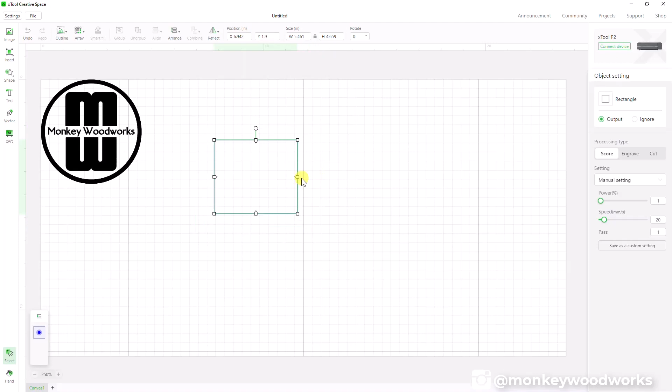So you control the size of it by either dragging it - grab a corner, grab a side or corner, and drag it. Come over here and do the same thing. Or you can come over here and set the size.

Let's say I want this to be 3 inches in diameter. So the width is going to be 3. And there you go, I got 3 inches wide and it's 3 inches high.

But let's say I wanted this one to be 3 inches also, but I want it to be 6 inches high. Well, if I come over here and type 6, now I didn't want that - I wanted it to be 3 by 6. Well, that's because you had the padlock turned on. You just turn it off and change this to 3. Now it's a 3 by 6.

So you have to have this proportionate lock on depending on what you're working with.

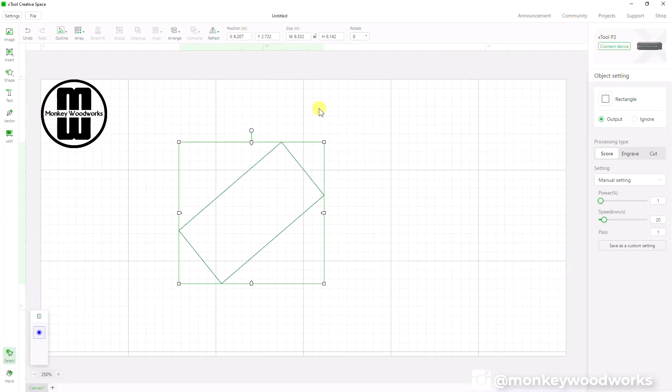Rotation is over here on the right. When you select the object, you can change the rotation of the object, or you can grab this little dot in here at the top and drag and change the rotation. A lot of times I rotate it, but depending on what I'm doing, I'm either going to do it by hand up here by typing, or I'm going to drag it. It really depends on what object you're working with and what you're designing.

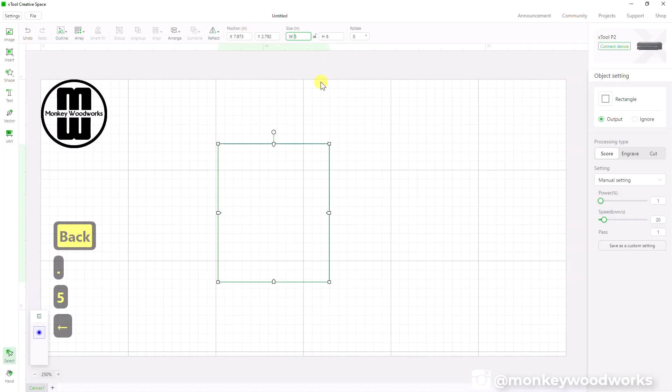Another thing I want to point out is a bug inside XCS. Let's say I wanted to make this rectangle a 1/2 inch wide. So if I come over here, take this out - this 3, backspace - I'm going to type 0.5. Wait a minute, that says 5. I want a point, so I moved my cursor in front of that 5.

I'm not sure if you can see it that well in this video. I'm typing the point, but it's not really doing anything. It's not changing this because there's a bug inside XCS. The way to get down into the decimals from a whole number is kind of goofy. You have to actually drag this by hand into the decimals.

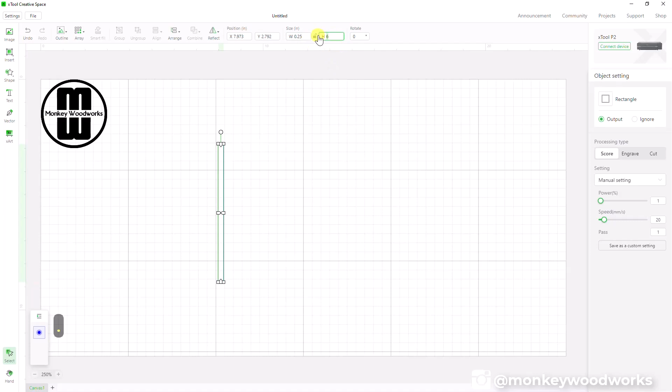Now I'm below that 1, and I can now convert this to 0.25. And now I'm at 0.25, right? So I can't make this 0.25 square because I have it unlocked. I want to say, all right, I'm going to change this to 0.25. My point's not working - why is it not working? Because of the bug inside XCS.

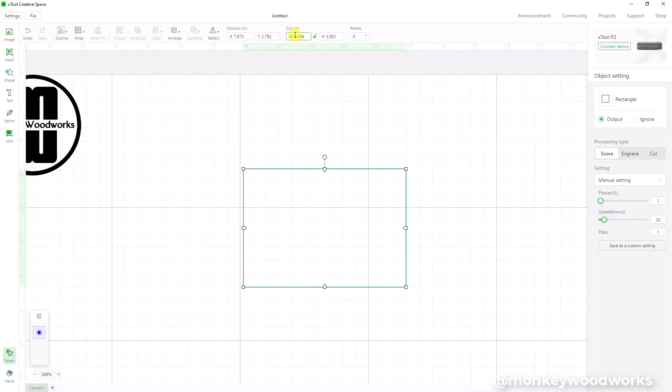You have to drag it below that 1, where you're into the decimals. And now I can say, all right, 0.25, go 25, and I can fix this one, 25. And there we go, there's my quarter by quarter square. So keep that in mind as you're changing the size of things. If you want to go from a bigger object down to something below that 1 mark into the decimals, you cannot do that by typing in up here.

Also over here on the left, you can insert a circle. You can click and start dragging.

If you hold down Shift, it makes it a perfect circle. Same thing with the square. If you click the rectangle, select and hold, you can make it as big as you want, or you can hold down Shift and now it's a perfect square.

The line is a little bit weird. It is kind of buggy sometimes. So if I pick on line, I can pick and drag a line. That's all well and good, but I want it to be horizontal or vertical. You can hold down Shift and now it's horizontal or vertical.

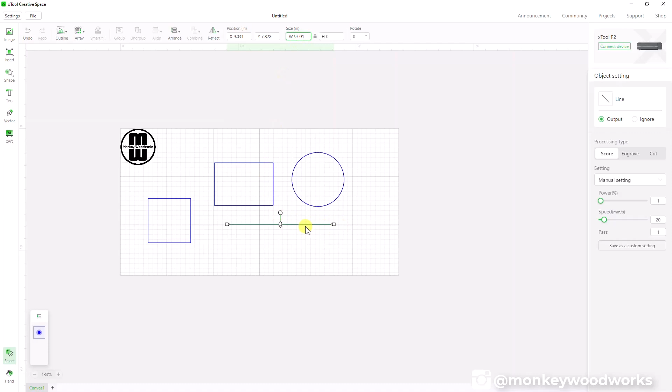However, let's say I want to manipulate this. If you're going to manipulate this line to adjust the width of it, I suggest you do it up here. Don't try to do it down here because it's kind of flaky. I'm going to set this to 5, okay? That's pretty easy. But if I accidentally try to move this thing...

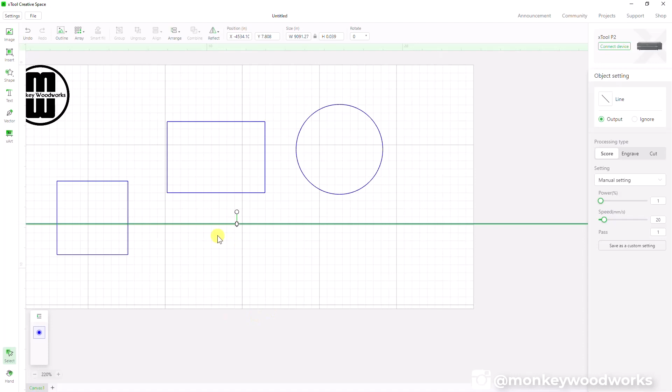Let's say for whatever reason I accidentally grabbed this and moved it. Well, now it made it an infinity line. It's all the way as far as this will go, and it's a crazy height, and it broke the line. So be careful with lines. Lines are kind of weird when it comes to actually moving them around. So that right there, I tried to grab it and move it, and it went infinity again, so I had to undo it.

You can change the rotation of lines, but really, manipulating lines to change the width or something, you're better off doing it over here. Over in the shape tool, you have the ability to add multiple shapes. This is really handy when you're creating different things and just getting started. You can drop in hearts, moons, triangles, rounded corners, squares, ovals, anything you want that's available right there. So that's really handy to have.

And then underneath that, you have the text tool. When you click that, the text will automatically show up on the screen. It'll automatically show up here no matter what. Even if you're zoomed in way over here and you click text, well, it actually shows up again at the top, sort of top center. You just have to remember that when you're trying to insert new text on the screen, you have to zoom out, find it, and move it where you want it to go.

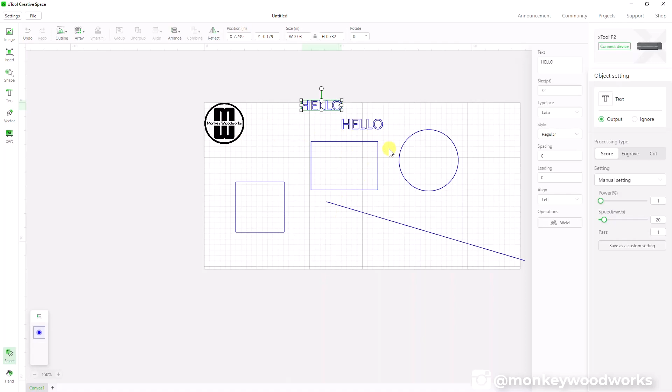It always shows up as the word hello right now, according to XCS. And to change the font, you don't actually double click on this font here. You come over here on the text tool. The text tool goes away when you don't click it. When you click it, there's your text tool, and here you can actually change the font.

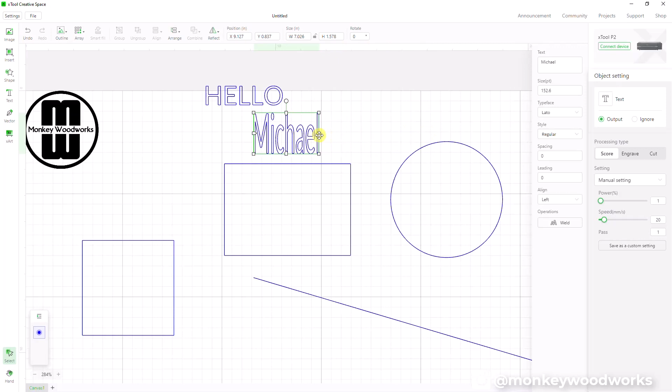I'm going to change it to Michael, and I can change the size. I can make it like, say, 90. That's all well and good, but I really don't use that - I most of the time use my drag. And the lock proportion works the same way with text. I can unlock it and make it squishier, elongate it, whatever you want to do.

Typeface is the font you use. The font it pulls is what's installed on your computer. So if you have a font you downloaded from Etsy or whatever, and you want to use it inside XCS, you can. Close XCS, install your new font on your computer itself. Once installed, launch XCS, and you should have that new font available inside here. You can go over here and type it, and as you start typing, it'll find it in there.

Another thing you can do is the style. The style is associated with the font chosen. So this font actually has these styles available, whereas maybe another font - let's pick this one here - this one only has these two styles available. So the styles are related to the font itself.

And spacing is the spacing between the letters. You can control that. If I hit 2, see the gap is much bigger than 0. And I can make it a -1 to make them even tighter.

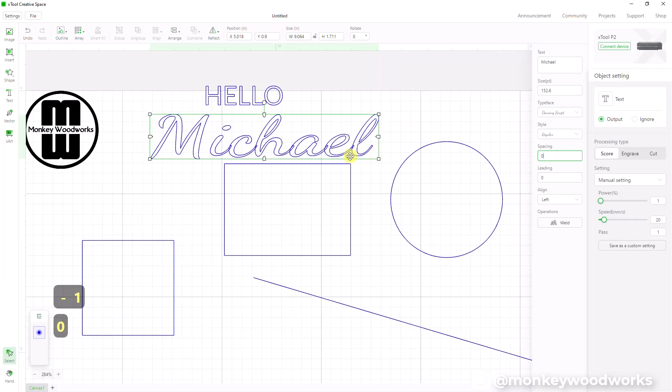And leading is something I don't use. It's a vertical alignment. So if I come over here, I'm just hitting enter and typing my letters. So I have - let me zoom out, move this over here - 'Michael is awesome.' And I'm going to come over here and change the leading to, let's say, 5, and it adjusts the spacing. Let's make it -2, so it adjusts the spacing in there. Honestly, I don't use that.

Normally, I'll make these 3 different text fields and align them myself.

But you can do it that way. Speaking of alignment, you have the ability to say left alignment, middle alignment, and right alignment. And that's handy only when the text is in one text field.

So if I had 2 of these, and let's say this one was left and that one was right, and I want to center these 2, you cannot do it because it's seeing 2 different text objects, so it cannot do that. You would use a different feature for that. But yeah, this affects only that one text object there.

And lastly is weld. Let me zoom in, let me change this to Michael. The weld feature is really cool. So, do you see this right here where the lines are kind of overlapping?

If this were to cut out, if I took this and cut it on the laser, it would cut the I and C and break them apart, and I'd have this little cutout drop into my honeycomb. And the same thing with all these - it would be separate letters. So I don't want that. I want this to all be a single solid piece where you can pick your text and select weld.

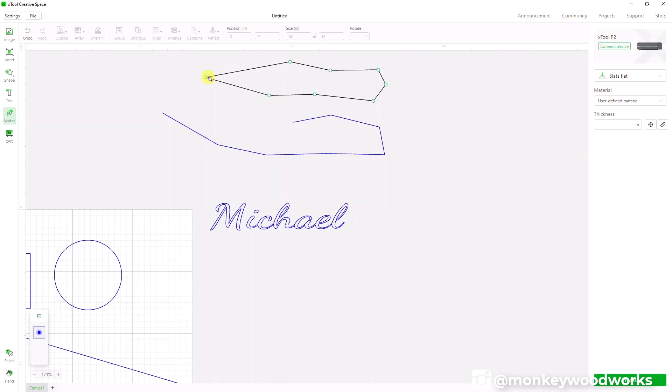Or if I want to make that same thing, only this time I want to close it, I just click on top of the original dot. It makes it a single piece, and it treats it as if it were one of these objects, right?

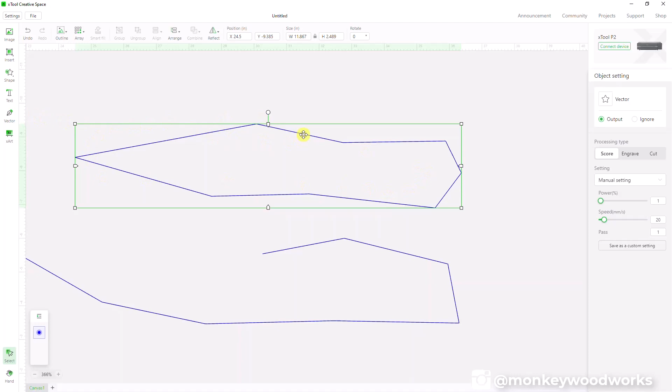But the one thing that's cool about this is, let's say I wanted to make these rounded corners and not pointy corners. Let me zoom in and show you what that looks like. Let me use my control key and zoom in. Since this was created using the vector tool, I can double click it. And now I can see my vector points selection that I did.

Each of these points is a hollow sort of dot. If I double click those dots, it changes to a solid dot. You can see that - every time it's solid, it means it's a rounded corner, and you can adjust how round it's going to be, the radius of it, by sliding these sliders.

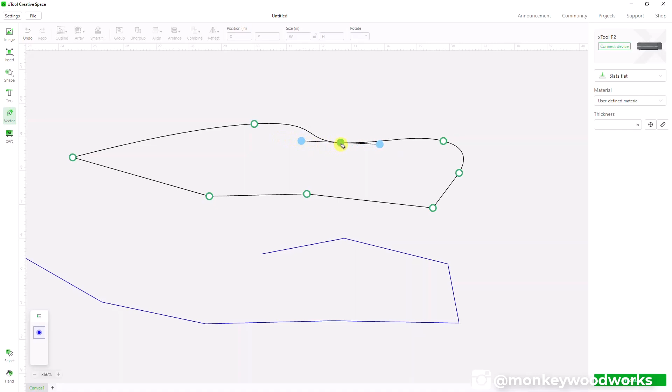If you want to convert it back - oh, you know what, this is supposed to be a sharp corner. Let me double click this again, and now it's a sharp corner again. So let's say this part right here, I want it to be rounded. I can double click this, and I can manipulate the round however I want and click off of it, and there you go. I don't know what that is, but it's there.

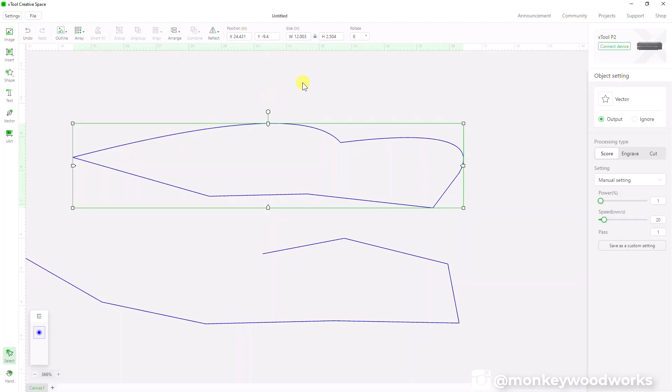If I want to change it back, I can double click it and make that tighter or make it pointed again. There we go, back to whatever this is. All right, holding down control and zooming my mouse wheel, and back out.

XArt, I am not going to go over that because that is a new beta feature that I don't know too much about.

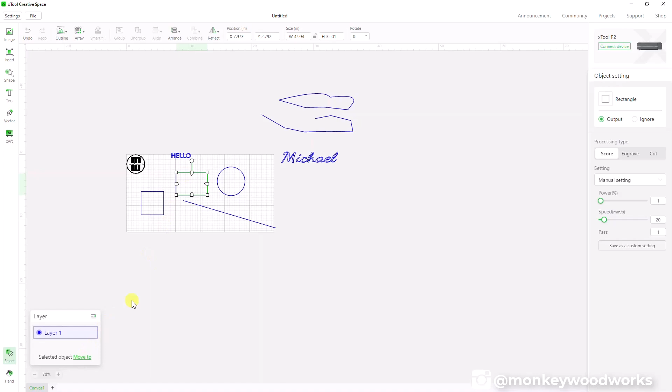Down here, this little menu is a layered menu. You can put objects on different layers, sort of like what you can do in Lightburn. Once you put them on a layer, you select the object, and you can say move to while it's selected, or right click it and say move to, and pick which one you want.

What I don't like is I don't use this because I'm colorblind and have a hard time seeing these colors. I can kind of remember, but I'm not sure which one this is, so I have to right click to check. I think it may be one of these three, honestly I don't know if it's this one or this one, because these colors are really close and I have a hard time seeing that.

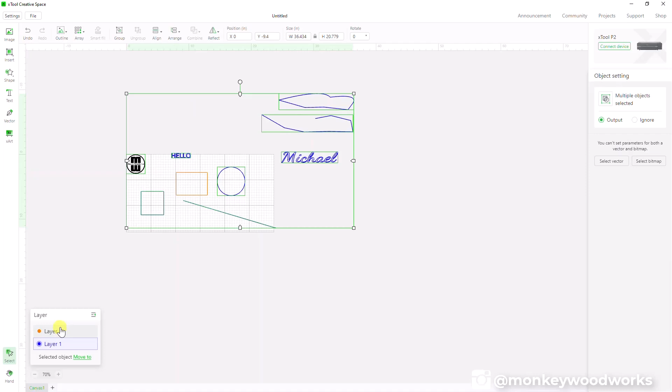So I don't use layers that much, but you can put objects in layers, and the advantage is when you select the layer, it selects everything in that layer to quickly do stuff with it on the machine. And when you send it to the machine, you set it to engrave, score, or cut, but we'll get to all that. That feature is available in there though.

All right, let's delete this. Let's insert some objects and talk some more. I'm going to copy this and paste it a few times. All right, we got that in here. So let's talk about some stuff up top.

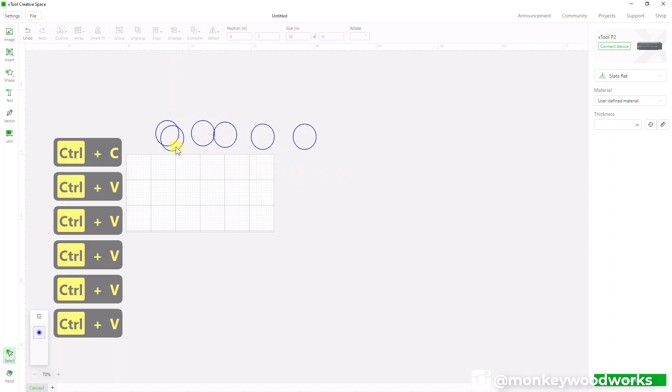These two objects, I'm going to select them both. I can combine them - if I say unite, now it's one piece. Undo that. If I select them both and say combine, subtract, what it did was... well, it's hard to see.

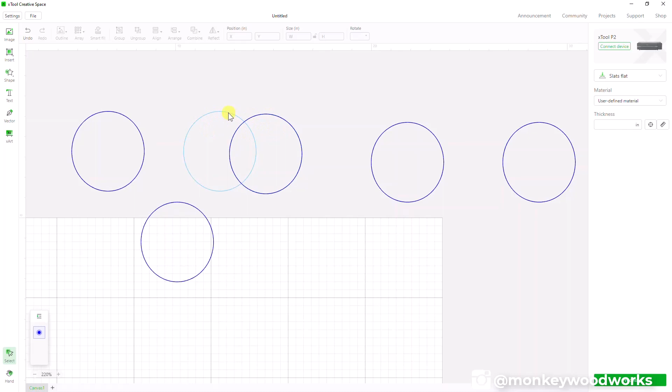Let me make this a little easier to see. What it's going to do is use the one on top to subtract from the one on the bottom. When I say top and bottom, one object is on top of the other. How do you control that? Well, I can go over here and say selected, arrange, bring to front, or send to back, or bring forward and bring backward, depending on how many steps you have. You just have to know which one's on top of another.

So let's say I bring this one to front. Now I know this one's on top of this one. So if I select these two, combine, subtract, it's going to use what's on top as the tool to cut what's behind there. So let me show you what it looks like. There you go - it was on top and it cut out what was behind there, so it just cut out and made it look like a cookie now.

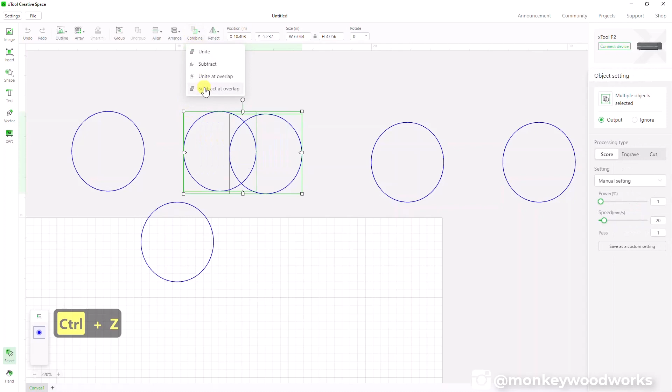If I undo that and select them both and combine, if I say unite at overlap, it's going to unite between the two objects. What was overlapped, that center eyeball looking thing, was the center of the two that overlap. I can undo that, and you can also play with subtract at overlap, which does the opposite of unite at overlap - it removes the outside edge.

Now it's been kind of hard to see, but let's do something - let's say you want to make a donut. All right, there's our donut. I'm going to select the little one and put him on top. Arrange, bring to front. Select the two.

Now the subtract at overlap is going to be handy. What that's going to do is use that little circle and cut out this little circle shape from the big circle. Because right now, the little circle, to show you, it looks like that - okay, the big circle, let me turn that back, the big circle looks like that. So they're literally full circles on top of each other, like two pieces of paper cut out.

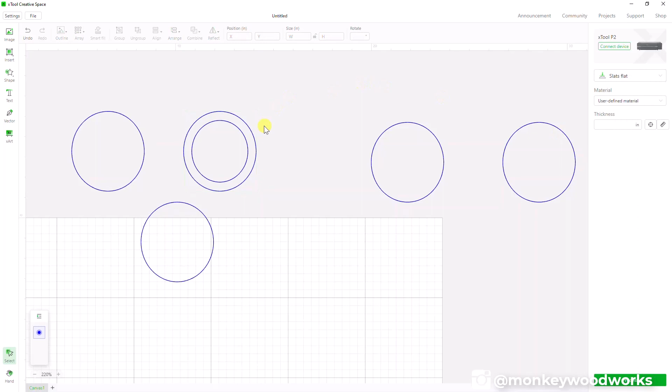But I want to use this little one as a cookie cutter to cut out from the big one. Again, make sure the little one's on top, bring to front, select them both, combine, subtracted overlap. Now this is one piece, but look what it does - it's a donut now. So the combine feature is really handy depending on what you want to do and manipulate. You just have to know what's on top of another, and you can do that by selecting and changing the arrangement of them.

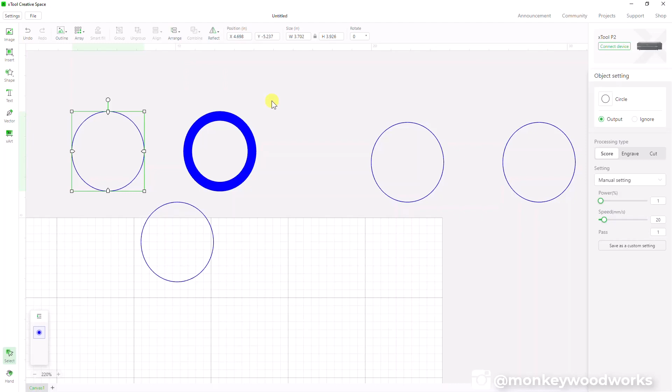Reflection, that's pretty easy to understand, I think. I'm going to put in a leaf, select it, and change reflection vertically.

It just flips it horizontally.

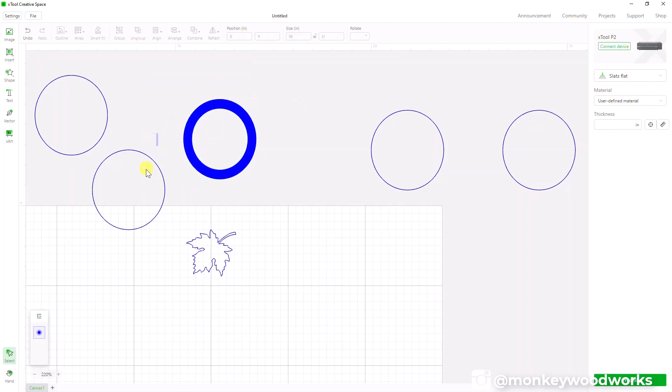Grouping and ungrouping: if you select two objects, you can group them together so they work as one. If you ungroup, they become independent again. You can group as many objects as you want. But if you ungroup a group of objects, they all break into individual pieces no matter what. So if I grouped two objects, then added another, and another, in separate steps of grouping, once I ungroup it all, everything becomes individual pieces. I wish it would step backward and only ungroup the last one I added, but it doesn't work that way.

Array and outline, let's talk about those. I'm going to come over here to my leaf and move it like that. There we go, that looks pretty.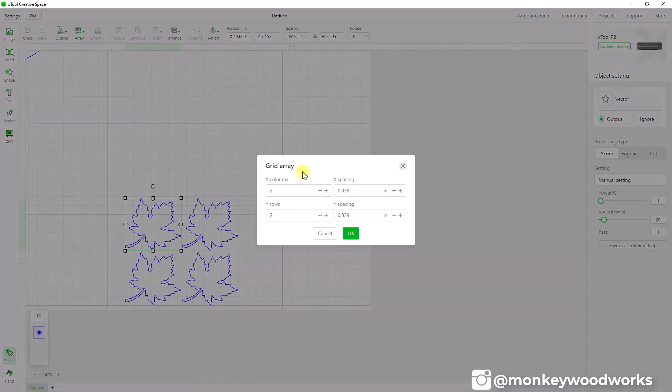Let's talk about array. Grid array is on a grid: how many horizontal pieces and how many vertical pieces do you want to multiply or duplicate, and what is the spacing between the objects? As you can see, the more you add, the more it multiplies. Let's change the spacing to 0.2, 0.2. This one's pretty cool, you can see what you're doing as you're doing it. However, I wish this grid array panel weren't in the way. I wish it were over on the top left or something, because it's always right in the middle of your screen and you can't move it.

Let me cancel that. The other one is circular, and this one's a little trickier. When you click this, the X and Y represent the center of the circle you're arraying or duplicating these objects around. Right now the center, as you can see in this object, is about right here where my pointer is, at 13.869 by 8.3.

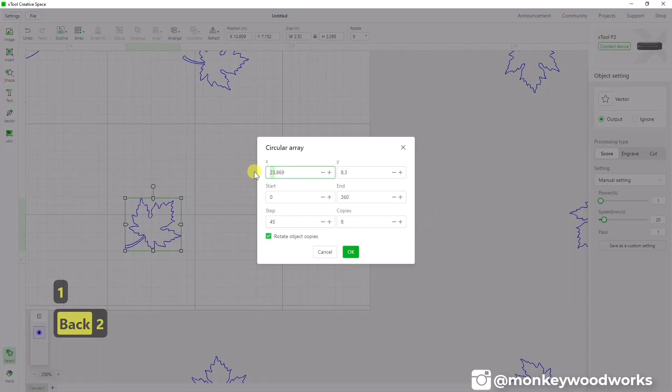So if I want to move this center around, I can. Let's say I want to move it over here some. I'll add about 10 to this value, so I'll set it to 23, which moves the center 10 over. That may be too much, let's drop it down to 18. There we go, that's easier to see. This takes some getting used to, and I don't want to go too deep into it, but this is the center of the array, the X and Y.

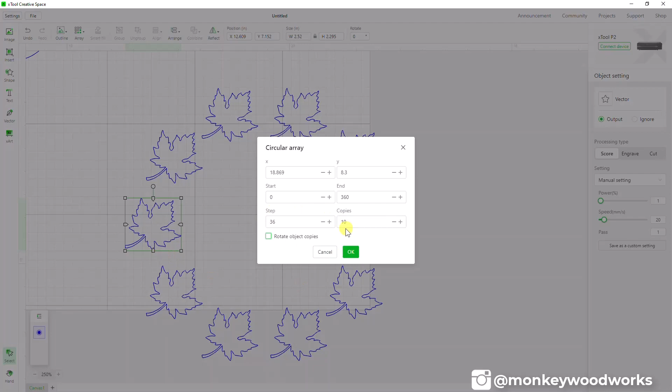For the circle, you're going all the way around, so it's 360 degrees, but I can set it to 180 and it only does half a circle. The number of steps is calculated automatically based on the number of objects and the circle size or degree. The number of copies is the number of objects you're duplicating, so if I add more, I'll get more leaves. Rotate objects asks whether to rotate yes or no. If it's on, objects rotate as they go around the circle; if off, they keep the same orientation all the way around. This depends on whether your design needs that.

All right, what else am I missing? I have combine, reflect, arrange, align. Let's talk about align. So let's copy this with Control C, Control V, and I had this one object selected.

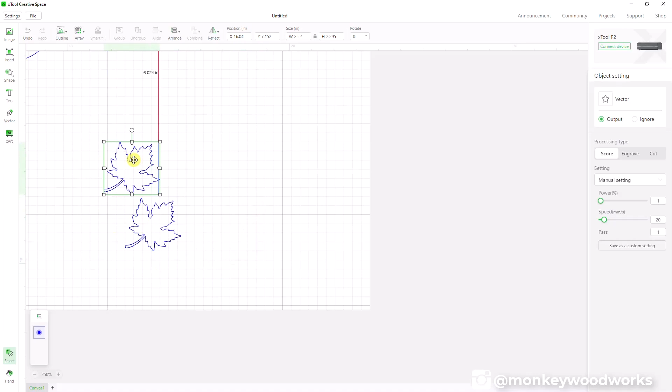Do you remember when I told you about auto snapping? When you're moving an object around, you see those lines popping up automatically, those are auto snapping lines. As you can see here, the lines line up, meaning I'm centered, on the edge, or at the top left or top right corner. That's what auto snapping does, and it's a really handy, quick way to align stuff.

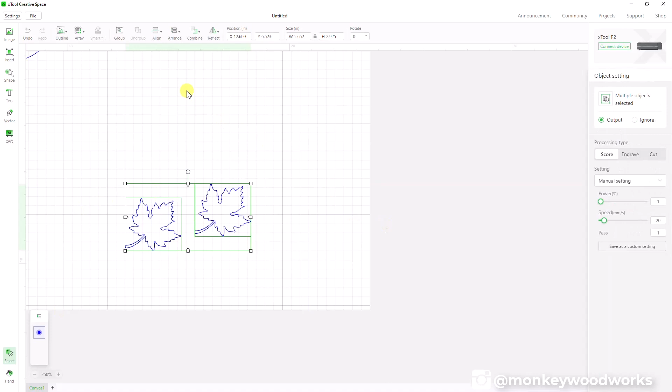If you have auto snapping off for some reason, and you want to align two objects horizontally, select them both, or select all however many you have, then choose align horizontal, and now they're aligned horizontally. If you want to center them on top of each other, you have to do it twice: horizontal and vertical, and now they're centered on top of each other. You can do the same thing for other alignments.

Let's say I want to align bottoms. You can come over here and say align bottom. There you go. Align tops - you can come over here and say align top. So there's different ways you can do that.

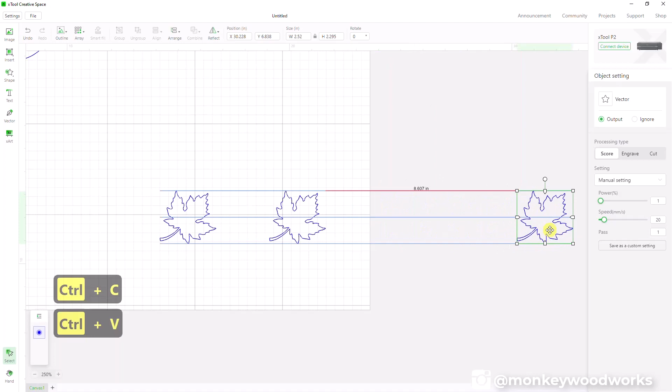If you have more than two, let's say we have these right here. I can select these, and let's say I want this guy to be in the middle of these three. You can do that by saying align, distribute horizontally. Doing that will make an even space between the three. So align horizontally - there you go.

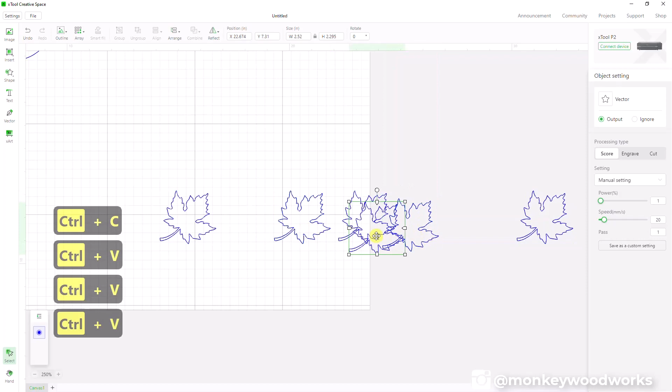So if you have a ton of these, it's going to distribute them evenly between the first one and the last one. Let's do that again - align horizontal, and there you go. They're evenly distributed. Now, why is this guy way down here and this one's not quite in line with that? Because I had them that way - all it cares about is distributing horizontally.

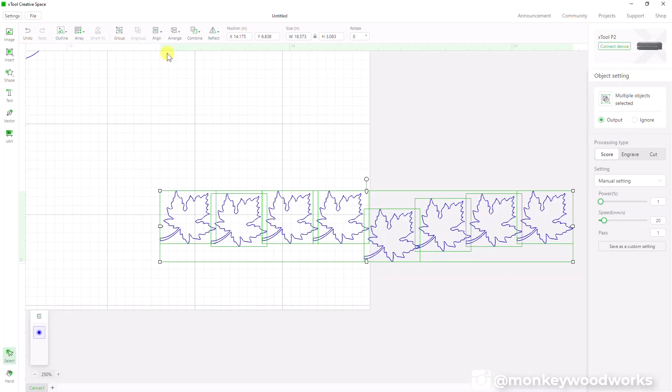If I wanted to align them vertically, I need to do align vertical, and now they're in line with each other. The alignment vertical does the same deal. Let's say I just distribute vertically - does the same deal, it does from the top down. Select them all, say distribute vertically, and now they're evenly spaced vertically up and down. And I can just align them like this.

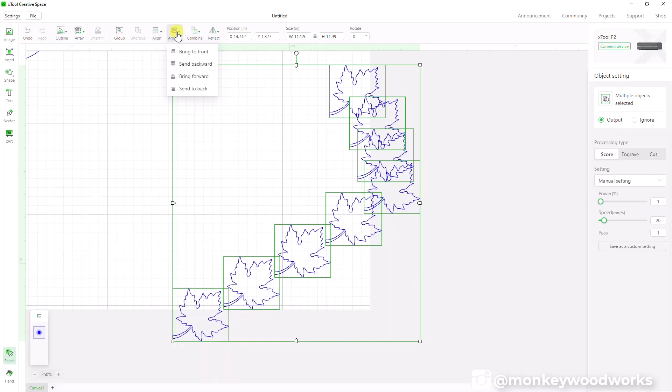So the alignment tools are really handy to have. Smart Fill - I cannot show that until I'm connected to the machine.

What else can I show you? Over here in the announcement, when you first launch Xtool XCS, Xtool Creative Space, it will show you the latest announcement that Xtool wants to push out to you. You can also come over here and view the announcements. You can go to community - that's how you get to the community group. It takes you to the URL, and you can talk about what all is out there in the Xtool community.

Projects are built-in projects you can pick from, and you can come over here and type the word bunny. If I type bunny, it says, hey, there's a couple bunny projects you can make. These are pre-made projects that you can actually import into XCS and make.

So if you don't know where to start, you can come over here to project, find something simple you want to make, like a bookmark. Book - I want to make a bookmark. Oh shoot, there's no bookmarks. Okay, let's see book, what else do we have underneath book? All right, we can make a cork notebook. Now let's engrave on that. Let's say, I don't know, the word cut.

Oh, here we go, door plate. Let's say I want to cut this out of wood. You can say I want to make this object - this looks really fun. So I'm going to come over here and click Start Project, and it'll dump it to XCS, and you can start working on that project. So that's pretty cool, handy for people that are just getting started.

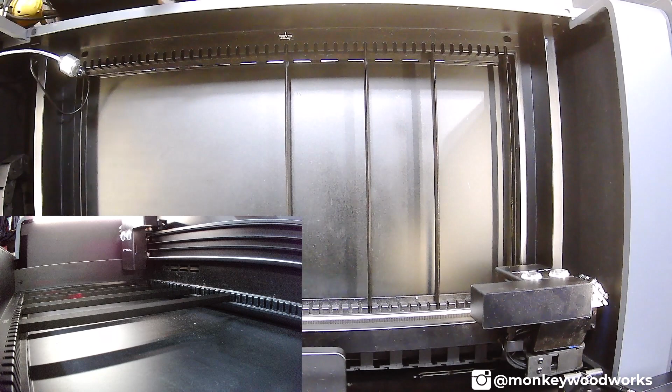So let's talk about XCS when it comes to the P2. Opening this thing up, as you can see here, I have the bottom tray installed, and I have a couple of slats installed as well.

Looking at XCS here, this is where you're actually going to connect to the P2. When it's connected, it's going to tell you if you're connected via USB or Wi-Fi. Also over here, it shows you your P2 or your M1, whatever device you're connected to.

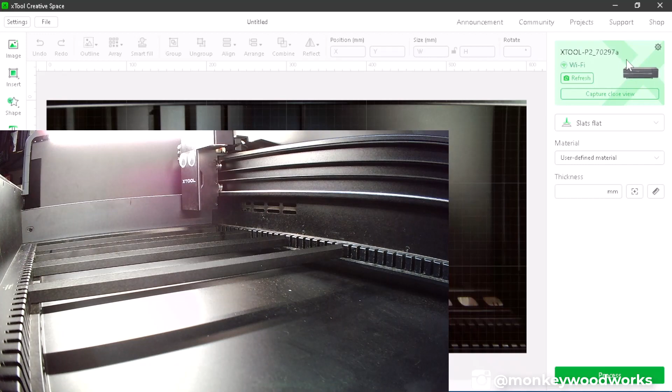Up here in the top right, you can select the gear icon. When you click on it, you have some basic information, your working information, basically how long the machine has been running. And in here is the settings.

In here you have base plate detection, which you can toggle on and off. Smoke exhaust after processing - you can actually turn that off if you just want it to stop right away.

Optical path test, we'll go over that another time, I'm not going to go over that right now. You can adjust the light inside of the P2, and right now I have it set to 20% because I didn't want it to interfere with the cameras that I have running.

The airflow of the air pump - you can set the airflow between engrave, and this also affects score and cut. Of course, cut you normally want to use 100%, but engrave maybe you want to cut it down to 50%. I know you definitely want to keep some air flowing, so you don't want to go below about 30%. And then the lowest output power, I'm not sure what this affects - maybe the laser, so that it doesn't allow you to go below 3% when you're running XCS.

I'm not 100% sure, this is a brand new software they actually put out yesterday, so I have the latest and greatest version of XCS.

So let's talk about the modes over here, but before I do that, let me put something on the screen. I'm just going to insert a rectangle and put it right here. When I have it selected, we have the option to change different things about that. But before we do that, we need to decide where we're going to put the material.

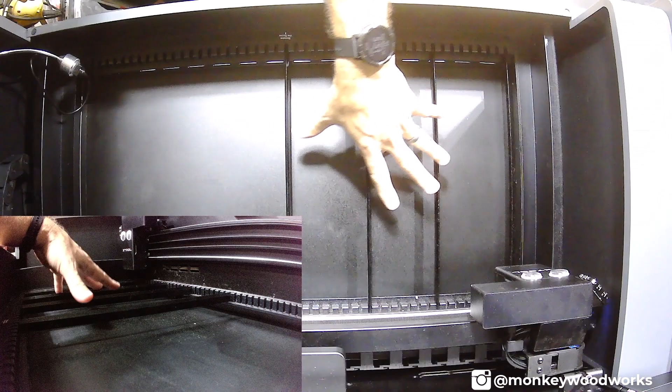So looking inside the P2, we have the slats installed, and I just have three right here, and there's one more over here on this side. When you put your material in here, it's sitting on top of the slats - that's when you're going to use the slats flat mode.

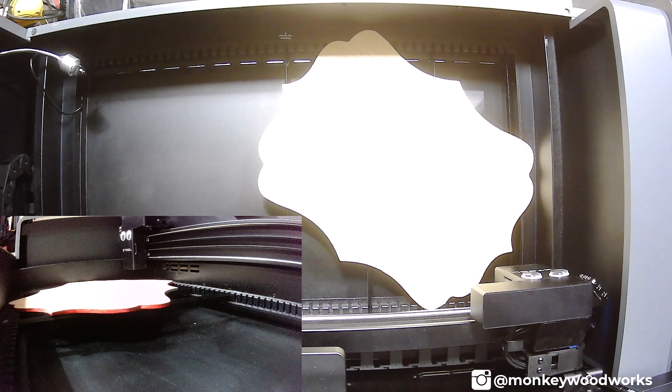Now whenever you want to use the open plane mode, when you select that, it's going to warn you to ensure the slats are removed. That's because this laser head can now go below the slats, and it doesn't care if the slats are installed or not - it's going to hit them and mess up your P2.

So talking about open plane, why would you want to use it? Well, that's because if your material is too thick - let's say I want to engrave on the top edge of this, I can't put it like that because it'll actually hit. So I could try this way - nope, that's still too high. I need to remove the base plate, so take the base plate out.

I can put it down here on the tabletop, and that would actually let me engrave on top of this, as you can see it's lower than my laser head. So depending on what you want to engrave depends on the mode you want to go with. Slats flat will be on top of the slats; anything else, open plane or curved material or whatnot, you really want to remove all the slats.

Again, make sure they're removed because that's very important. And then you can take your tray out or leave your tray in depending on if you meet the minimum height requirements to reach the laser head.

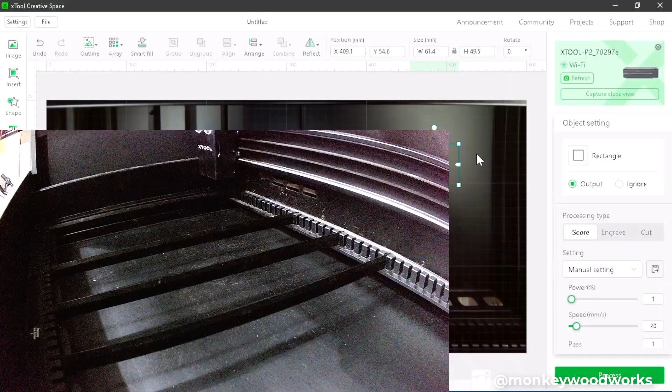Okay, I'm back in slats flat mode, and I have the slats installed in the P2, and I want to put in this piece of material and engrave or score my little square on there for whatever reason.

Now, how do you know how to adjust the laser head? That's when you come over here to the right, and you're actually going to adjust either the material or the thickness. If you know the material thickness - and usually this is built in from the Xtool settings - you can pick a predefined Xtool material, and it will set the focus for you based on the mode you picked here. If you don't know it, you can take advantage of using the broad measuring tool, the precise measuring tool, or you can type it in by hand.

So I have placed my material inside of the P2. Why don't I see it yet? Because I need to refresh the P2. If I hit this right here, it's going to refresh the picture.

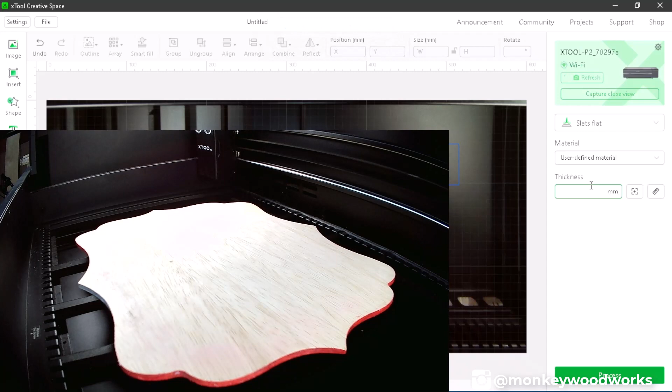So it turns on the lights because it's been sleeping for a while, and it takes a picture of what's inside the P2. I'm not sure if you can see it in the software very well because I'm covering it up with the camera. However, it did take a picture of the material.

Let me see if I can flip this off. There, now you can see that a little bit better. Now that I have the picture of the material, I can move my engraving where I want it to be inside there. Let's say I just want to put it in the top right. Now let's say I want to get it really close to the edge. The refresh does a global view, or the overall view of the camera.

Now I can use the close view camera and zoom in to get a really close-up shot of this corner here. When you click this, it's going to have a little target, and you can move that over here in this direction, and when you click this, it's going to actually zoom in, move the laser head, and zoom into that location.

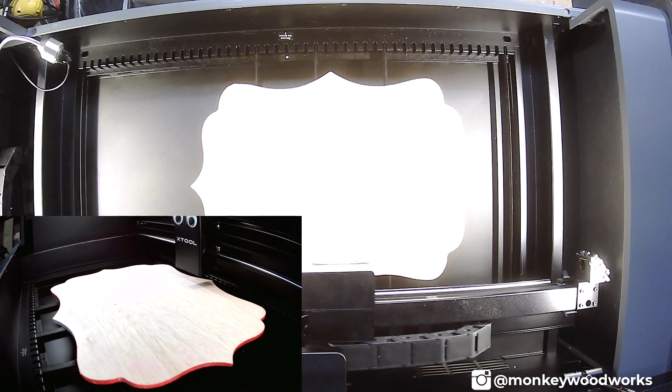Over here on the right, it's actually capturing still. When it finishes, it's going to give you a nice in-focus section right there. So that means it actually zoomed in, and this is the overall - it's kind of sort of grayed out and not as clear - and this is the zoomed in view.

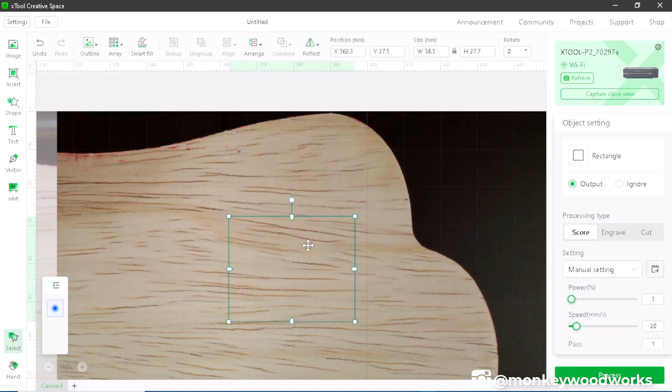So now I can zoom in. We'll use control and mouse wheel to really put this rectangle, or this right here, at the edge of this material. That way you can make the most of your material and align stuff up the way you need to see it. Now, talking about this material here, this object that I have in here, let's talk about the different processing modes you can do.

You can do a score, which is drawing a line around the perimeter of the object, or basically drawing the object that you see on the screen. Engrave is a fill, it fills in the object, and cut is the same as score, only it allows you to actually cut the material. Now, when it comes to cut and score and engrave, you have to adjust the settings.

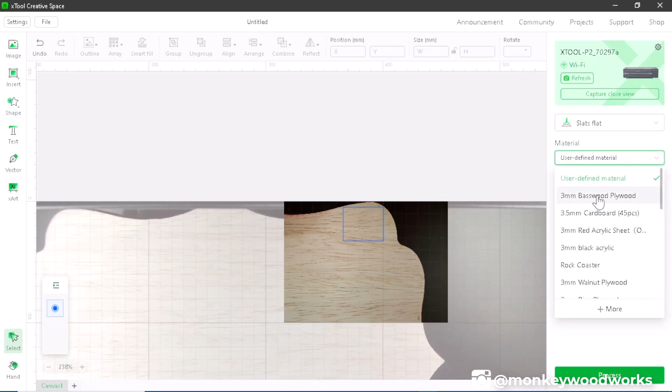Again, you can adjust the settings manually by coming over here and picking the default material. If I pick 3mm basswood and come over here and select this and pick score, it's going to automatically have the settings based on what Xtool recommends you should use for this P2. Engrave does the same thing - it uses a certain power percentage and speed.

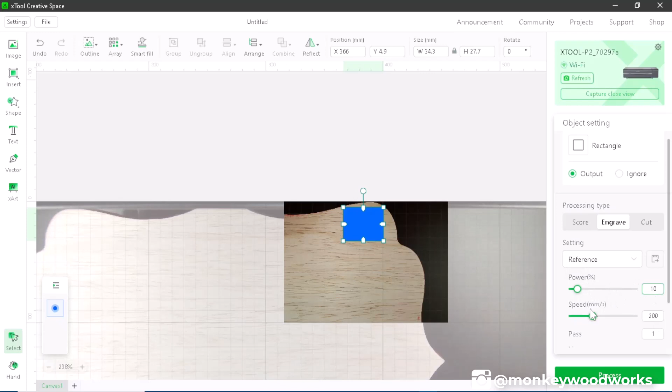But if I want to choose my own settings, I can come over here and go to user defined. This material may not actually be in this drop down - it's something that I know the thickness of, but XCS does not know the material. So I'm going to come over here and manually put the thickness of 5mm because I know that's what it is. Let's say I didn't know what it was - you can actually use the measurement tools.

Now, when you put the material inside the P2 - this is going to be kind of hard to show, let me see if I can show this to you. I'm going to close this lid and reopen it. There you go, you see that laser light right there? That laser light needs to be on top of the material. There's actually a laser in the top right hand, or back right hand corner, shooting down at the material, measuring how thick that material is.

So coming back over here at the desktop, you can use this right here that says quick measure. This is actually utilizing that laser to tell you how thick that material is based on the mode you have selected. When it finishes, it's going to tell you how thick that material is. So according to this quick measure, it's saying it's 6.4mm. Now let's say this were, I don't know, two pieces together that you needed to engrave two different spots on - it wasn't completely flat, and you had a raised piece you're going to do a different engraving on, and it's not underneath that laser.

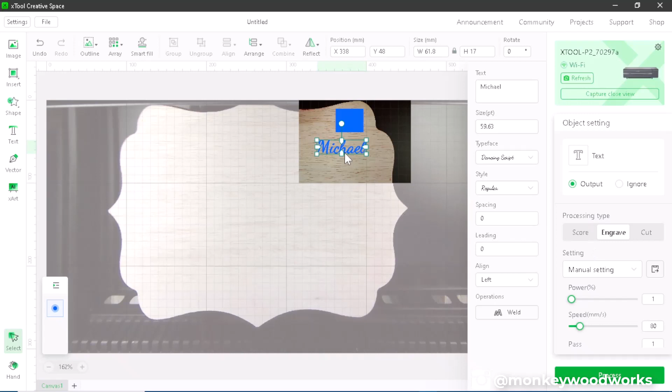So I just added the word Michael in here, and I have it set to engrave. I can come over here and let's say I want to engrave the word Michael and cut it out using this rectangle. So I'm going to select this rectangle. I had the padlock turned off, and I want to size it so that it's over the word Michael.

But why does it look like that? Why is it solid? That's because you're still in engrave mode, so you have to pay attention to which mode you're in. I'm going to come over here and select cut, and now let me zoom in, and now I can see this is actually going to cut around the word Michael.

Now, XCS does do a smart job of doing things in the proper order. However, there are times I've found that it doesn't quite understand it. So if I want to be sure to do one process before the other, I can tell it to ignore. Let me click on the cut and say ignore. If I process this, which sends this to the P2, it's only going to process the ones that are enabled, and since I turned this off by saying ignore, it's not enabled, so it's not going to actually process this.

So if I hit this now, it's going to come up with a preview to tell you what it's going to do, and it's only going to engrave the word Michael. Now I'm going to hit back and cancel this. But if I wanted to keep going, I could hit process, hit the button on the P2, and it would start engraving.

So let me go back, and let's say I'm finished engraving and now I just want to cut it out. I can turn this off by selecting Michael, ignore, and then selecting this and saying output. So output turns it on and ignore turns it off. If I hit process, now you're going to see just the rectangle and not the word Michael. That is really handy to do if you want to pick and choose which things you want to do at the time of the project you're working on.

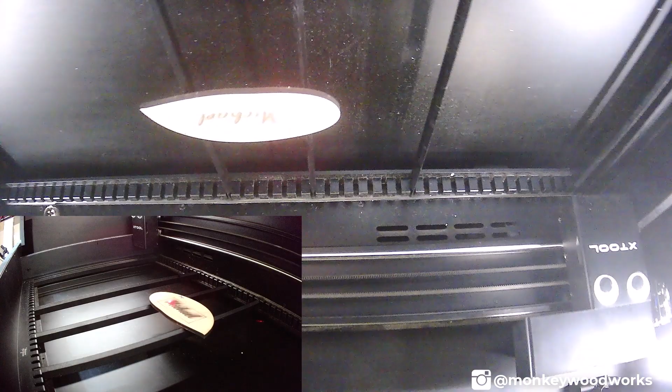Okay, so let's open this up and let's see what it looks like. All right, so this is what it looks like. I think this came out pretty good, especially just throwing some guesstimated settings at it. I didn't even look at my cheat sheet or my Google sheet.